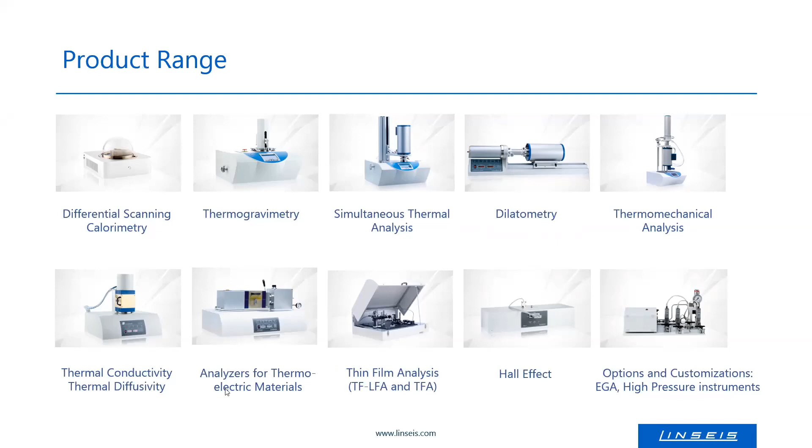But today's topic is thermal conductivity. So there are mainly 6 instruments I want to show to you. Those are the heat flow meters, the TIM tester, TIM standing for thermal interface material, we'll see later on what this is. LFA standing for laser and light flash analyzer. The transient hot bridge, hot wire technique, and 2 instruments for the characterization of thin layers, the thin film laser flash analyzer and the thin film analyzer.

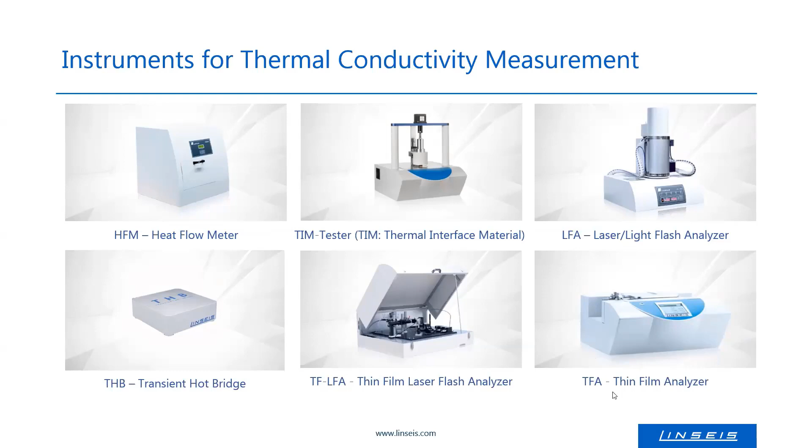Gases have low thermal conductivities as well. Liquids in general have thermal conductivities also far below 1 watt per meter Kelvin, mercury being an exception, but mercury should perhaps better be considered as a metal, and metals have the highest thermal conductivities of all materials. Copper has a thermal conductivity of approximately 400 watt per meter Kelvin.

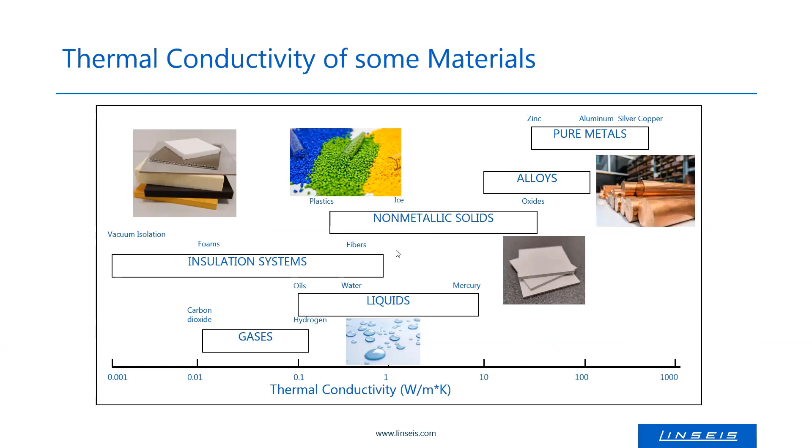In between are the non-metallic solids, plastics with quite low thermal conductivity, oxidic materials, ceramics, in general with thermal conductivities reaching some tens of watt per meter Kelvin. Alloys usually have slightly lower thermal conductivity than pure metals. So thermal conductivity covers a quite broad range from 0 to, let's say, 1000. And thermal conductivity is also dependent on the temperature. So depending on the application of your material, you should pay attention also to the measurement temperature.

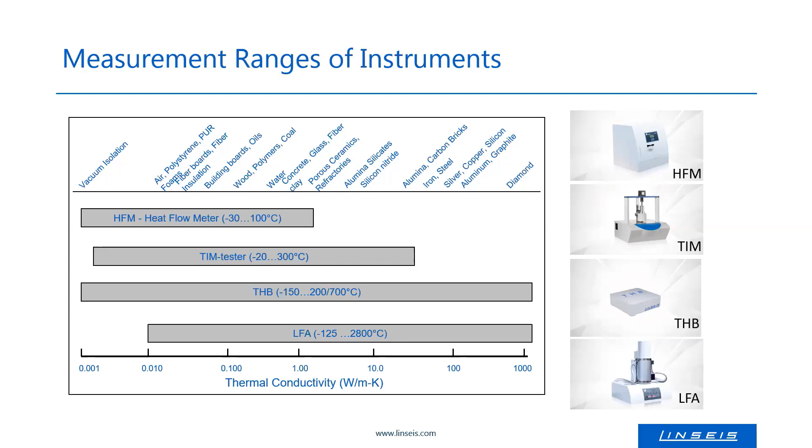So some instruments like the heat flow meter and the thermal interface material tester have a quite restricted temperature range, from low temperature to 100 or 300 degrees, while the hot wire method, transient hot bridge, covers a broader temperature range, and the broadest temperature range is that of the light and laser flash analyzers, from very low temperature up to very high temperature. Obviously, such a broad temperature range cannot be covered by only one furnace, but there are different furnaces for different temperature ranges.

So let's have a look at the measurement methods. They are divided in two groups, the so-called transient or time-dependent methods and the stationary methods. In a transient method, the sample is subjected to a thermal disturbance. So you have a short energy pulse, and then this disturbance is observed as a function of time. So you have a look at how this disturbance propagates through the sample. Important transient methods are the hot wire techniques and the laser flash technique.

Their advantage is that the measurement time is usually very short. They cover a very broad thermal conductivity range and a broad temperature range. The drawback is that the theory is quite complicated, but this is not the user's problem, but the instrument and software manufacturer's issue. And this is solved by us as a manufacturer.

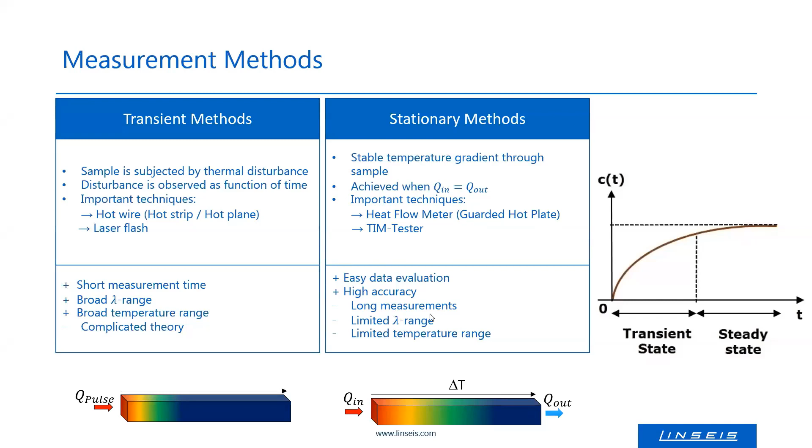So stationary methods work in the way that a stable, no longer time-dependent temperature gradient is established through the sample. And this is achieved when the incoming energy equals the outgoing energy of the sample, and there is a temperature gradient on it. The important techniques are the heat flow meters, the thermal interface material testers, and also guarded hot plates. The advantage is that the data evaluation is easy. The methods are very accurate, but they need quite long measurement times, and the thermal conductivity and the temperature range are restricted.

So let's have a first look at a first instrument, the so-called heat flow meters. They work according to a stationary method. So in such an instrument, you have a sample which is positioned between a heated plate and a cooled plate. Cooled plate and hot plate are kept at a constant temperature, while the heat flux through the material is measured by some transducers. And knowing the geometry of the sample, you can calculate by these formulas the thermal conductivity.

In real life, this looks like this. You have a hot plate on top. You have a sample and a cold plate below the sample. And between the sample and the hot side, there are some heat flux transducers. And between the sample and the cold side, there are heat flux transducers. As I already said, if the heat flux into the sample equals the heat flux out of the sample, you are in a steady state, in equilibrium, and you can measure the transferred heat and get thermal conductivity out of it.

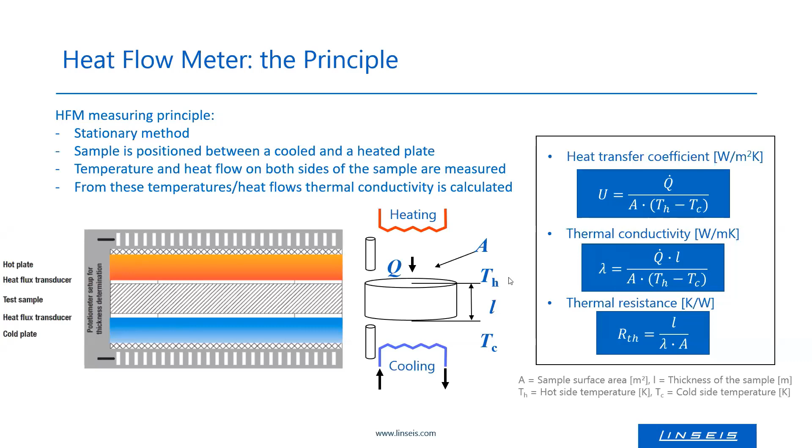A typical sample size is a board or a block of 30 by 30 centimeters and a thickness of a couple of centimeters. Usually compact solids are analyzed, but there are also adapters for powders and granules.

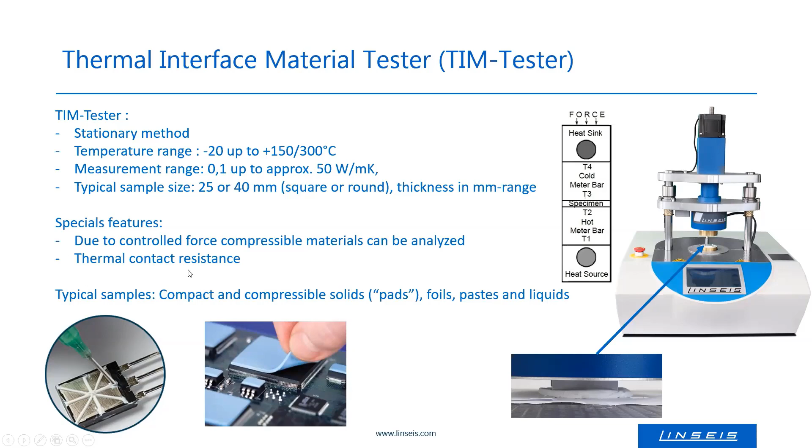So with this instrument, you can measure thermal conductivity not only from hard and compact solids, but also from compressible materials. And you get not only thermal conductivity, but you can also get the thermal contact resistance. How this is done is explained in an American ASTM standard.

So you have to prepare 3 samples out of the same material. They should have 3 different thicknesses. And then you run your measurement. And the raw data from a measurement is the so-called thermal impedance. And if you plot the thermal impedance of these three thicknesses against their thickness, you will find 3 points which are hopefully on a straight line.

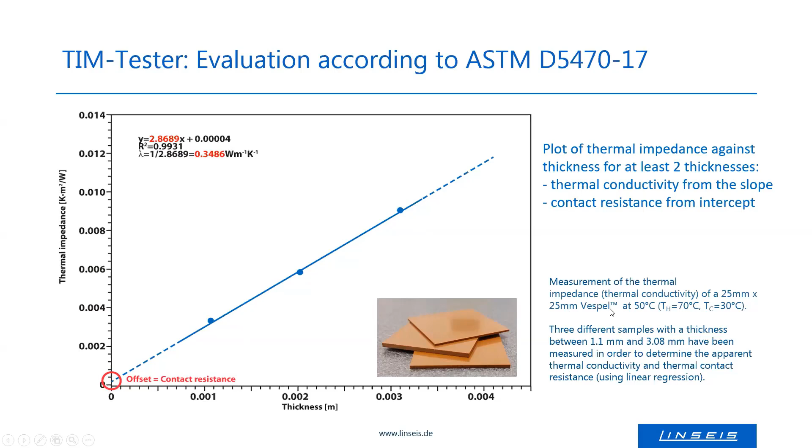And from the slope of this straight line, you can calculate thermal conductivity. And the intercept, the offset, is the so-called contact resistance. The example shows a Vespel material, a polymer. So those were the most common stationary methods.

Let's switch to a very common transient or time-dependent method, the so-called laser flash analyzer or light flash analyzer. This method is described again in a standard, and the standard says that a small thin disk specimen, a sample, is subjected to a high intensity, short duration radiant energy pulse, usually a laser pulse, but it can also be a light pulse from a xenon flash lamp.

This energy pulse is absorbed on the front surface of the specimen. So on this surface, the energy is absorbed, and then the energy will travel through the sample and will come to the rear face. And the resulting rear face temperature is recorded. So there is a detector, usually an infrared detector, observing the rear face of the sample and monitoring the temperature increase over time. And from this detector signal, you can get thermal conductivity. How this is done will be shown on the next slide.

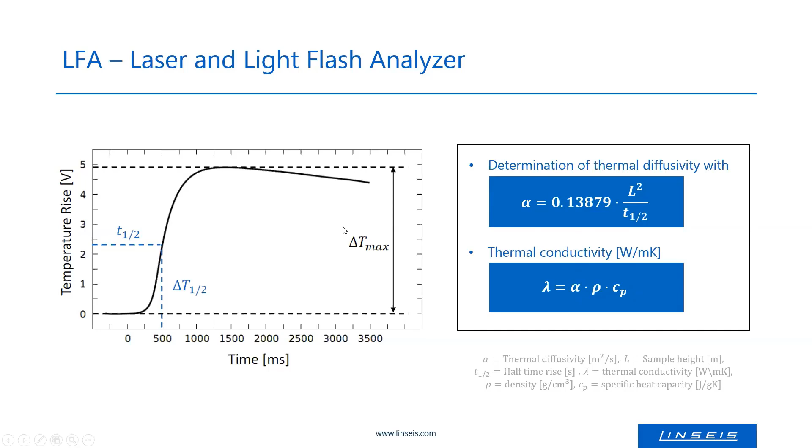As said, the principle is a transient time-dependent method. It covers a very broad temperature range and also a very broad thermal conductivity range, from poor thermal conductors to very high thermal conducting materials, so all types of material. A typical sample size is a disk of either 10 millimeter diameter or 25.4 millimeter diameter, which corresponds to an inch. It's an American standard. This is why this diameter is often used.

Such a disk should have a thickness in the range of approximately 1 to 3 millimeters, and it has to be well defined because you need the thickness, because you will square it to get thermal diffusivity. So every error you make on the thickness measurement and on the sample preparation will be squared.

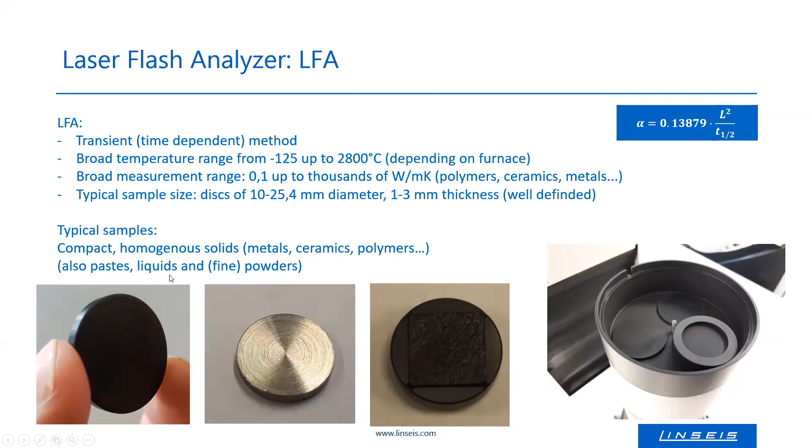Samples can be round. There are adapters also for square samples. Usually the samples are compact, homogeneous solids; they can be metals, ceramics, polymers, and other materials. And there are special adapters to analyze pastes, liquids, and also fine powders.

The second transient method I want to show is a hot wire technique. We realized this technique in our transient hot bridge, called THB. So as the name says, you have a wire which is heated. You have a thermometer close to this heated wire, and wire and thermometer are surrounded by the sample material to be tested. Once more, this is realized in such foil sensors.

In these foils are embedded hot wires which can be heated by an electrical current, and there are thermometers. And from these sensors, which are connected to the instrument and to a computer, you again get a temperature-time signal. In this case, the plot is done against the logarithm of time. And this yields this pink curve. The green curve corresponds to the slope of this pink curve.

And there is a maximum in the slope. And from this maximum, thermal conductivity can be calculated. This is done by the software. And you can also get thermal diffusivity out of this curve.

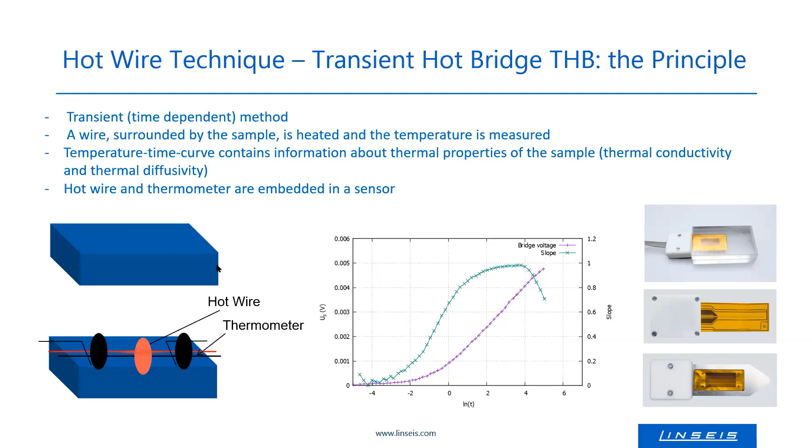So the temperature range depends on the sensor and furnace which you use. These polymer foil sensors cover a range from low temperature up to 200 or even 300 degrees. And there are ceramic sensors available going to higher temperatures. The measurement range is very broad, from isolating materials to high thermal conductors like metals.

And a typical sample size are 2 blocks, because you have to embed your sensor between these 2 blocks of the sample. And the blocks have to cover at least this inner part of the sensor, which has a size of 1 by 2 centimeters. The needed thickness of the sample is in a range of a couple of millimeters, and the required thickness depends on the thermal diffusivity of the tested material.

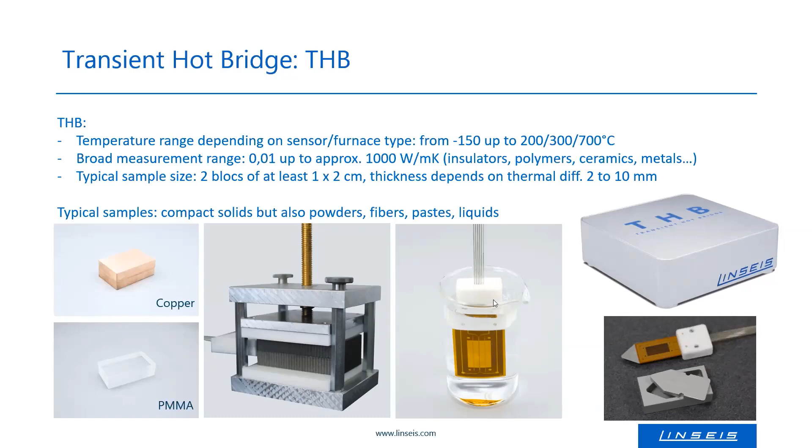So typical samples are these compact solids. This is plastic, this is metal, but you can analyze also powders, like shown here with this powder adapter. So you can fill powder in this hole, in this adapter, and insert this so-called penetration sensor in the powder. And you can analyze liquids just by dipping the sensor in a liquid.

So those were the analyzers mainly intended for bulk materials. Let's have a look on the instruments intended for thin films. Those are the so-called thin film analyzer TFA and thin film laser flash analyzer. They are intended to measure really very thin films in the nanometer to micrometer range and in a moderate temperature range.

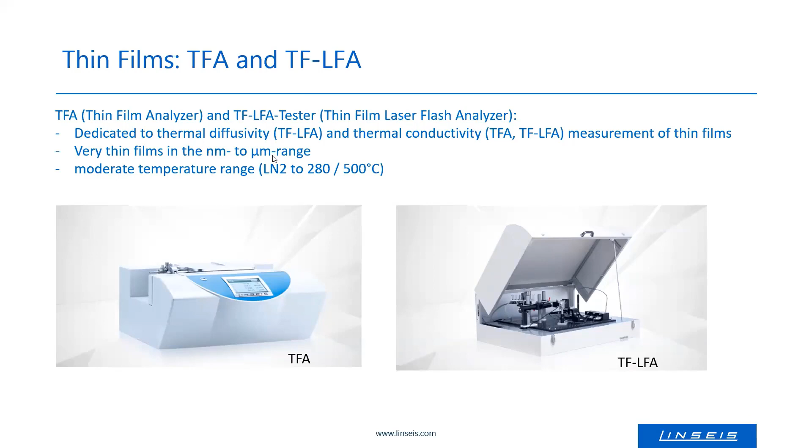So let's have a look on the thin film analyzer. It's a transient hot wire method. For those who know a little bit about the different theories, it's a 3 omega method. The thin film has to be deposited on a disposable sensor. The sensor is shown here in this picture. And the sample has to be deposited in this region. This is shown here on the picture.

And then the sensor with the sample is positioned in a sensor holder, which can be heated or cooled by liquid nitrogen by these pipes. And then you can perform a measurement in the TFA analyzer, and you get thermal conductivity and also specific heat capacity. And depending on the configuration of your instrument, you can also measure electrical parameters like the Seebeck coefficient, the electric conductivity, and the Hall constant.

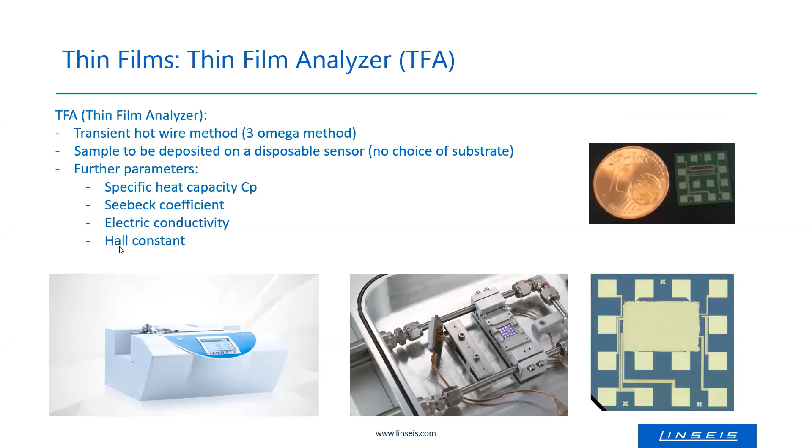And the second instrument dedicated for thin films is the thin film laser flash analyzer, TF-LFA. It's also a transient method, so-called time domain thermoreflectance method. In fact, it's a modified laser flash method. In a laser flash method, you use a short pulse laser to heat the sample's front surface. In a usual laser flash analyzer, this laser pulse has a length of a couple of microseconds to milliseconds. Due to the thin layer in a TF-LFA, you need a shorter energy pulse in a nanosecond range.

And instead of the infrared detector in a usual LFA instrument, which is a quite slow detector, you need a faster detection technique to monitor the surface temperature. And this is done in this analyzer by reflected light. So you have a continuous light, and the intensity of this reflected light is measured. And as the reflectiveness of the surface will depend on the surface temperature, once more you can calculate out of this time temperature curve the thermal diffusivity.

One important topic is that you do not do the measurement directly on the thin film, but you have to cover the thin film by a thin layer of gold, which is a reflective layer, and it serves as a kind of a thermometer because the reflectiveness as a function of temperature is known. So a typical sample is a sample covered with gold. So every sample you analyze is yellow. You put this sample in the sample holder in a furnace, which is here inside the TF-LFA, the thin film laser flash analyzer.

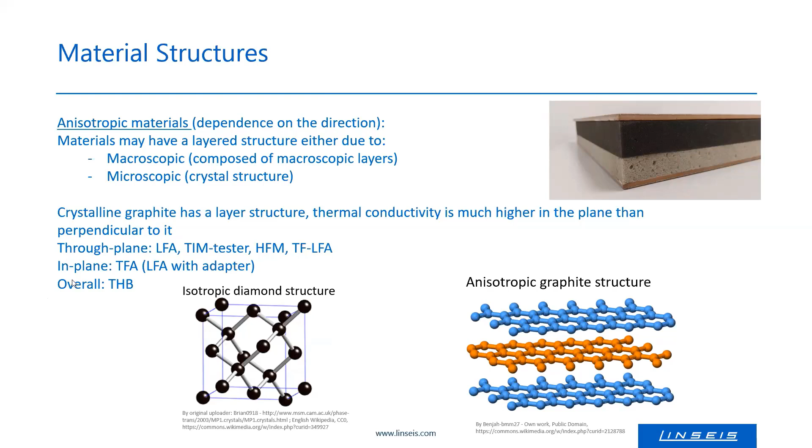Second point is the material may be inhomogeneous. For homogeneous material, there is no problem. You can analyze it with every method you like. But inhomogeneous materials have different compositions according to the space. So there may be grains of different composition and of different thermal conductivity.

So your method, if it has a small space resolution, you will measure perhaps only the thermal conductivity of one grain, while other methods measure the thermal conductivity of the whole sample. And usually you will be interested in measuring the whole sample, like in this example of a tile.

So if this is the case, you have to analyze not only one sample, but place your sensors or cut a specimen from different places of your sample. We will see this in an example at the end of this webinar.

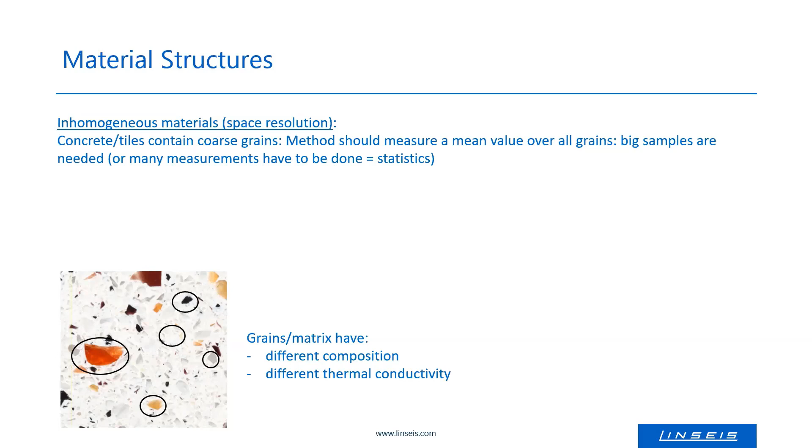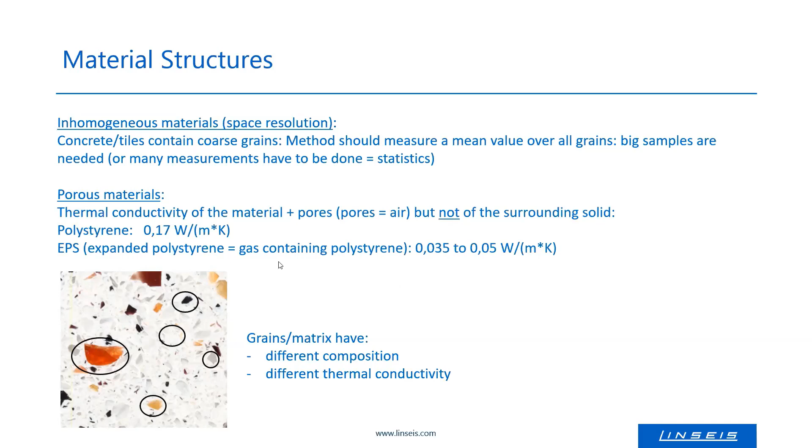A special example for inhomogeneous materials are porous materials. So in these cases, there will be no grains, but holes, which are usually gas-filled. And a very known example is expanded polystyrene. Polystyrene is a compact polymer having a thermal conductivity of 0.17 watt per meter Kelvin.

But the expanded polystyrene contains holes which are gas-filled, and due to these gas-filled pores, the thermal conductivity of expanded polystyrene is much lower than of polystyrene itself. So measuring the thermal conductivity of a porous material, you will not get the thermal conductivity of the surrounding solid, in this example the polystyrene, but you will get the overall thermal conductivity of the solid with the gas inclusions.

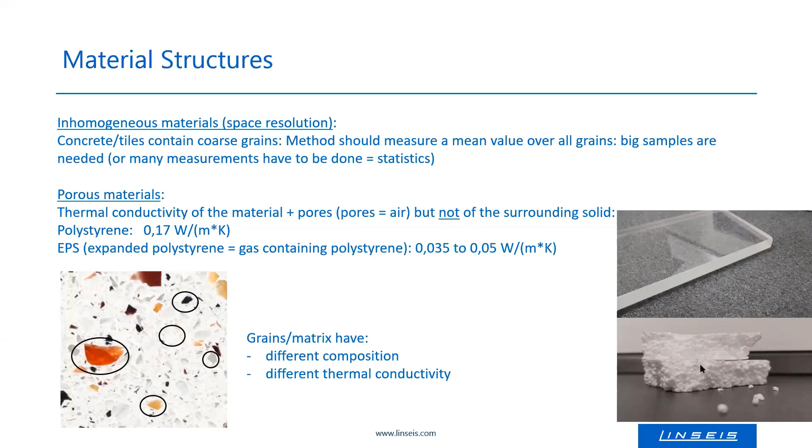So there are different material types, which I already showed briefly at the beginning. There are insulating materials like expanded polystyrene or fiber, straw, all these organic materials, often air-containing materials, which have very low thermal conductivity. And usually the temperature range you are interested in is quite close to room temperature, because most of these materials are used more or less at room temperature.

An exception are fiber insulations used in furnaces, for example. Their thermal conductivity has to be known at high temperatures, even exceeding 1000 degrees centigrade. Polymers have a slightly higher thermal conductivity, but it's still quite low. And the temperature range of interest is usually below 300, often even below 200 degrees centigrade, because at higher temperature the polymer will decompose or melt, and it has no application at high temperature.

The thermal conductivity of ceramics depends strongly on their structure and composition. Porcelain, for example, has a quite low thermal conductivity of approximately 1 watt per meter Kelvin, while nitrides have very high thermal conductivities of hundreds of watts per meter Kelvin. And ceramics are often used at high temperature, so your analysis should cover a quite broad temperature range as well.

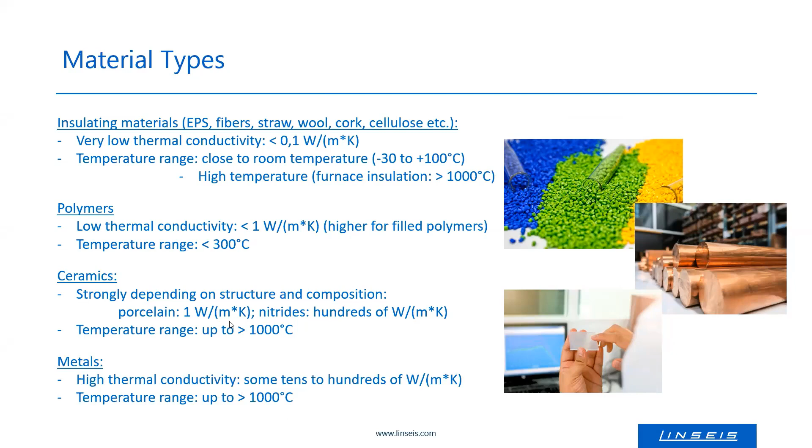So if you select an instrument for your specific application, you have to consider some criteria. The first criterion is the thermal conductivity range you are interested in. I divided them in 3 groups: a low range, a mid-range from 5 to 50 watt per meter Kelvin, and a high range. And depending on the range, you have to select your instrument. With the heat flow meter, you can't analyze highly conducting materials.

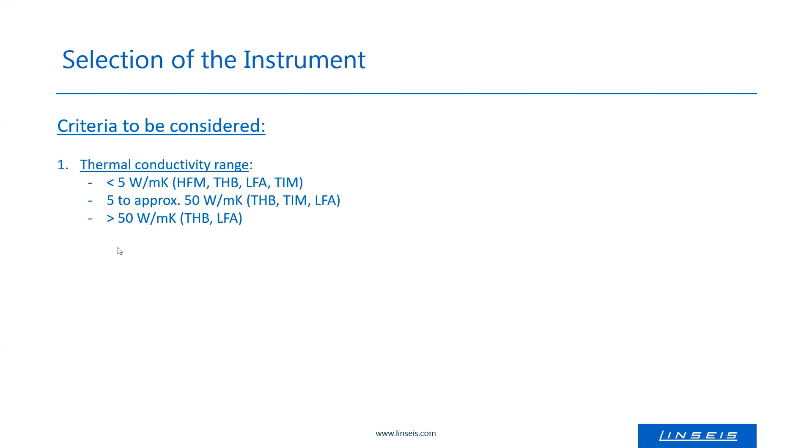The second point to consider is the temperature range you are interested in. Some instruments are able to measure at low temperature or close to room temperature. Others allow measuring the moderate temperature range, and others go even to very high temperature.

The third criterion is the sample size and its homogeneity. So there are instruments for thin layers. There are instruments which can analyze samples in a millimeter to centimeter range, and others need very big samples in the decimeter range, like the heat flow meter.

The fourth criterion would be isotropy or anisotropy of your sample and the direction of the measurement. Some instruments can analyze through the plane, others in the plane, or the same instrument, the laser flash analyzer, for example, can be used for through-plane and in-plane measurement, but it needs a certain adapter and sample preparation. And the transient hot bridge measures an overall thermal conductivity.

And last but not least, if you have to purchase an instrument, its price can be interesting as well. Laser flash analyzers are the most expensive analyzers, while the heat flow meters are the cheapest ones.

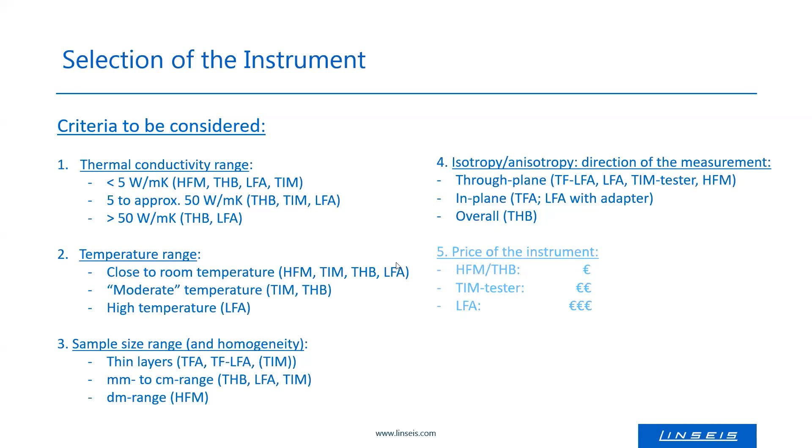So all this is summarized on the next slides. I divided them in three temperature ranges: a low, close to room temperature range, moderate, and high temperature range. I divided them in three thermal conductivity ranges: a low, a mid, and a high range, and the required sample dimensions: decimeter, centimeter, micrometer range, or even sub-micrometer range.

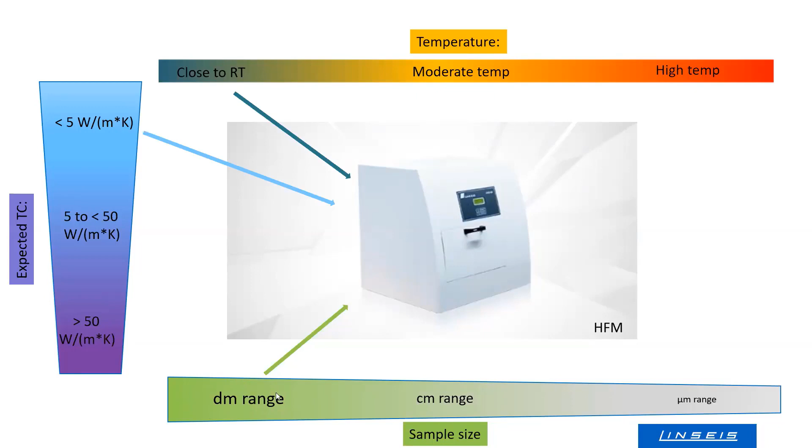The heat flow meter is dedicated to perform measurements on insulating materials close to room temperature and on very big samples of more than 10 centimeter sample dimension. The TIM tester has a broader temperature range, goes to moderate temperature, goes to the middle thermal conductivity range, and needs samples in the centimeter to sub-centimeter range.

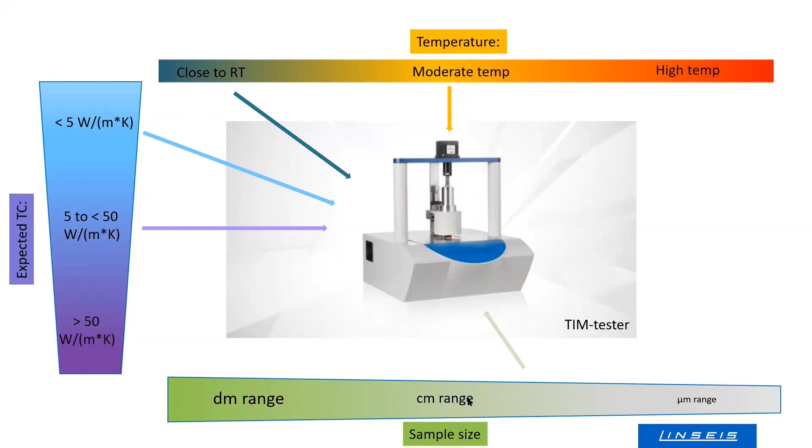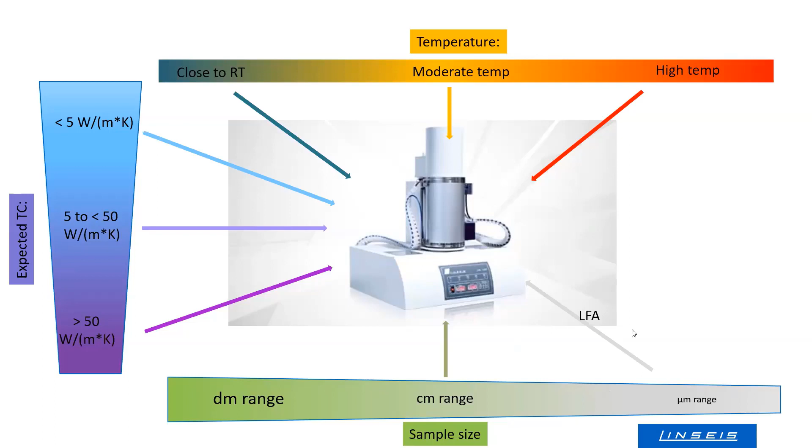The laser flash analyzer, being the most widely used instrument, covers the complete temperature range to very high temperatures as well, covers the complete thermal conductivity range from insulating materials to highly thermally conducting materials, and needs samples in the centimeter and sub-centimeter, even down to the micrometer range, for certain samples and certain adapters.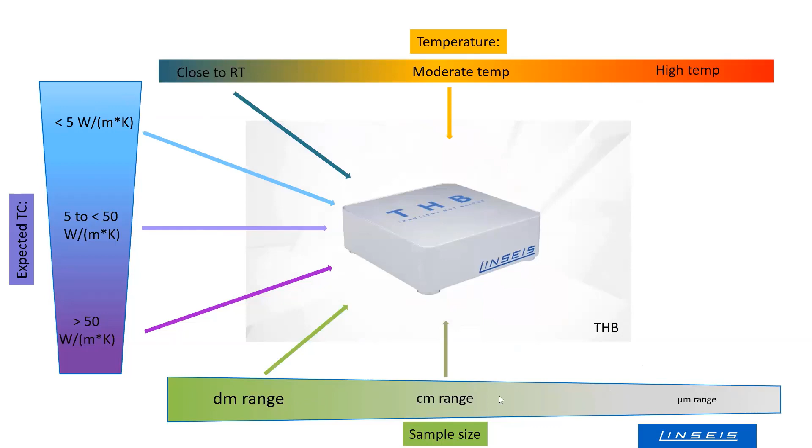The transient hot bridge covers the low and moderate temperature range, all thermal conductivities, and samples in the decimeter to centimeter range are needed. Last but not least, the thin film analyzer and thin film laser flash analyzers are dedicated to analyze samples in the sub-micrometer range to the micrometer range, in a moderate to low temperature range, and the full thermal conductivity range can be analyzed.

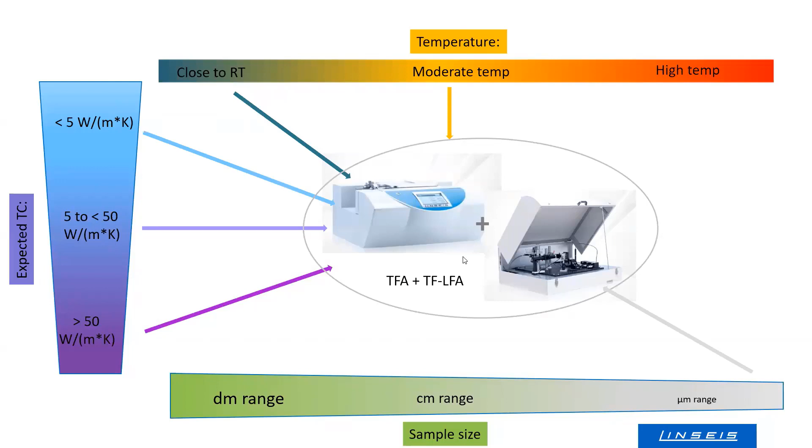Don't worry if this was a little bit fast. You will get a recording of this webinar, and you can have a closer look once more to memorize what is shown on all these pictures. You will find also on our website some tables showing which instrument is suited for which parameters, which price, with which temperature range, and so on.

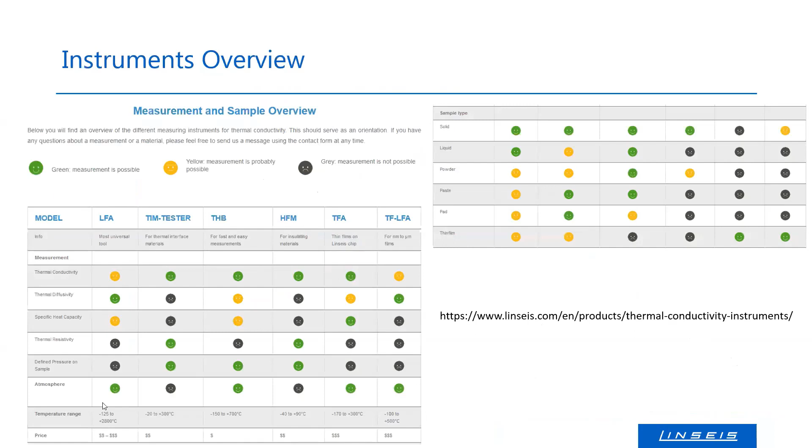So let's have a look at a couple of examples. The first example is a classical polymer application from room temperature to 100 or 150 degrees, which is often the melting point of the polymer. Sample can be prepared, let's say, in the size of approximately 10 by 10 centimeters and a thickness of 1 centimeter. So this would be such a block, for example. And thermal conductivity of a usual polymer is in a range of 0.1 to 0.3 watt per meter Kelvin. And the polymer is isotropic.

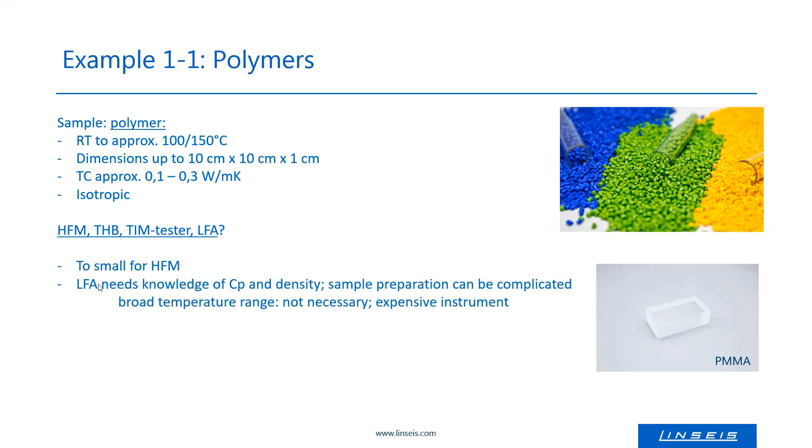So which instrument can be used? It will be too small for the heat flow meter needing samples of 30 by 30 centimeters. It would fit in a laser flash analyzer, but the laser flash method is perhaps a little bit complicated because you have to know the heat capacity and the density, and you have samples to be prepared with a well-defined thickness. One of the big advantages of a laser flash is the very broad temperature range which is covered, but this is not necessary for our polymer. And last but not least, it's a quite expensive instrument.

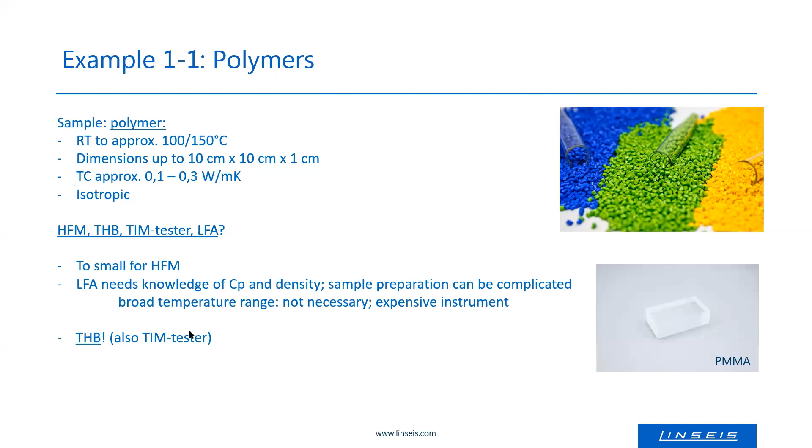So you can run the analysis on a laser flash analyzer, but certainly there is an easier method. And the easier method is the so-called THB, the transient hot bridge. It has an easy sample preparation, covers the temperature range, the thermal conductivity range. Sample is big enough. Material is isotropic. Everything's perfect for a transient hot bridge. You can also consider a TIM tester, but this would need a more complicated sample preparation. So for a simple polymer, things are very simple. The transient hot bridge would be the best choice.

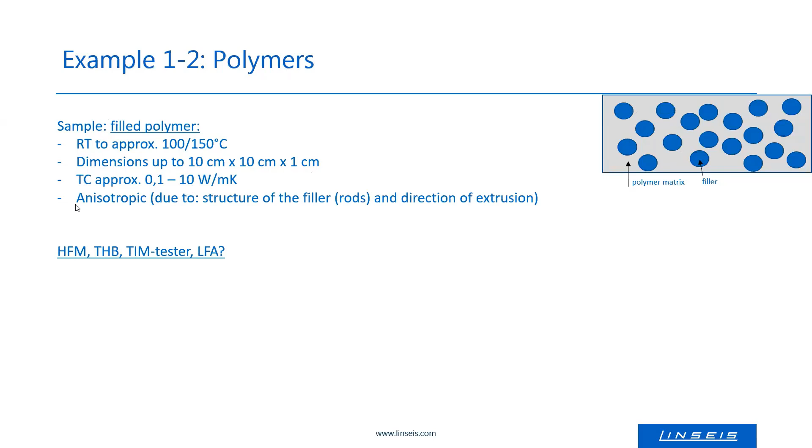Let's make things a little bit more complicated and go to a filled polymer. Filled polymer means you have a polymer matrix, and there are some grains included. This is often done to increase thermal conductivity of the polymer for a specific application. The application temperature would be the same, sample size the same, but the thermal conductivity will be much higher, perhaps up to 10 watt per meter Kelvin. And the material may be anisotropic. If your filler has a rod-shaped structure and you do an extrusion in a certain direction, the rods will be directed and thermal conductivity perpendicular to the sample plane will be different from the thermal conductivity in the plane.

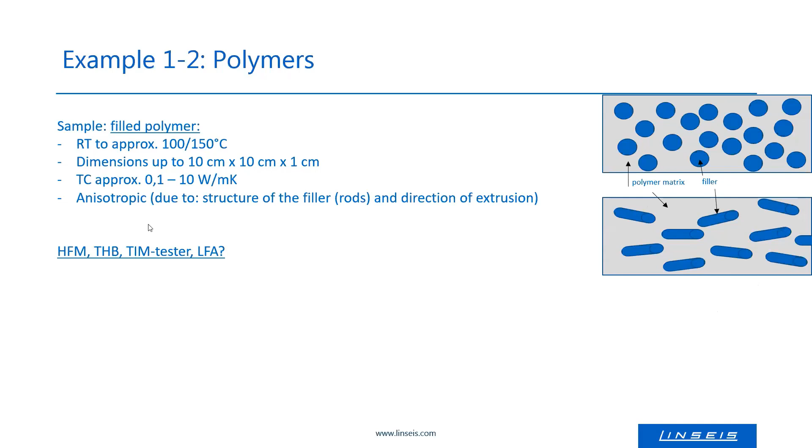So now things are a little bit more complicated. Which instrument to choose? In this case, it would be the laser flash analyzer or the TIM tester, because these two instruments measure the thermal conductivity cross-plane, so through plane or perpendicular to the sample's plane. With a laser flash analyzer with a special sample adapter and sample preparation, you can also measure the thermal conductivity in plane. Perhaps you can also consider the transient hot bridge if you are just interested in the overall thermal conductivity, which is not dependent on the direction.

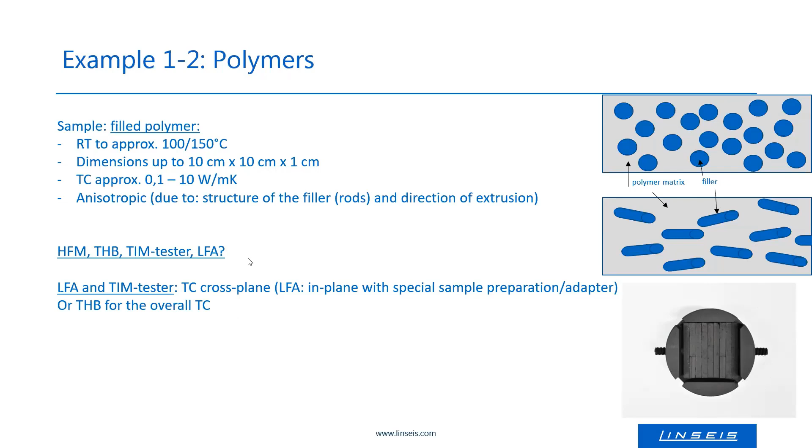And a last example for polymer, a soft polymer or a foam like shown in this picture that is compressible. Application temperature size will be the same as before. Thermal conductivity due to these air inclusions in the foam will be quite low. The material is certainly isotropic. So which analyzer shall be used?

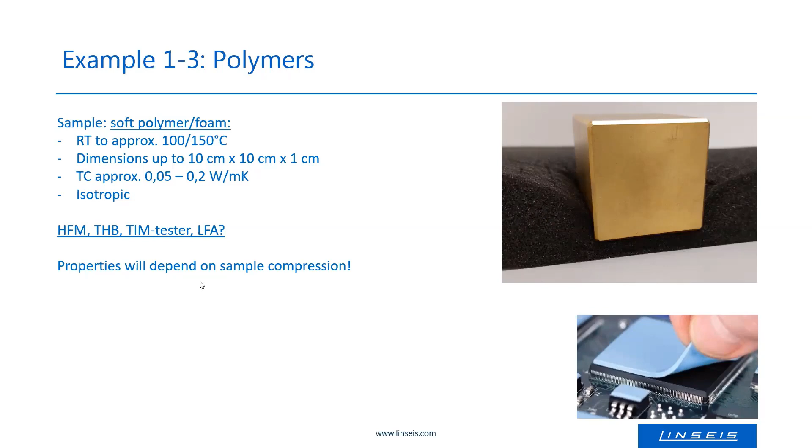In this case, the thermal conductivity will depend on the compression. So if you do a measurement of this compressed foam, there is less air in this material than in the non-compressed foam, and thermal conductivity of this compressed foam will be different from thermal conductivity of the non-compressed foam. So you have to consider that your properties of the sample will depend on the sample's compression.

And the TIM tester allows to control this compression, and you will get not only thermal conductivity, but also the contact resistance. So the TIM tester could be the perfect instrument for such a compressible polymer. You can also consider the transient hot bridge. You can use it with a special accessory to control the pressure of the sample. And if very big samples of 30 by 30 centimeters are available, you can also consider the heat flow meter.

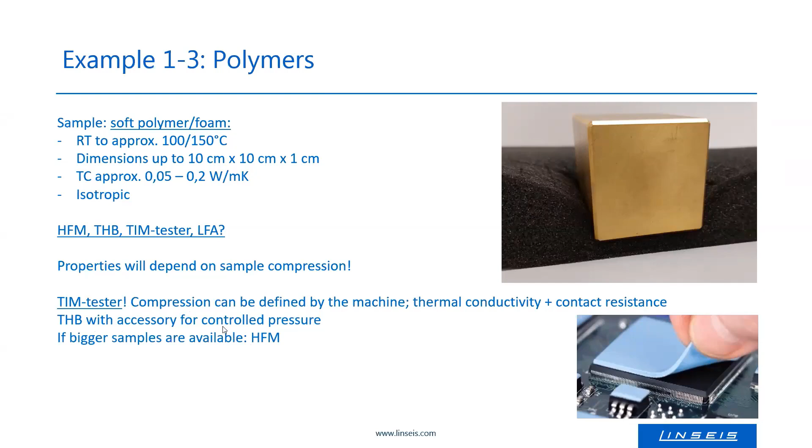So those were 3 examples of different kinds of polymers. Let's have a look at an example of a ceramic. Ceramics are often used at very high temperature. The dimensions, let's say they are the same as for the polymers we saw before. But the thermal conductivity range is very broad. It can be 1 for porcelain, and it can be hundreds of watt per meter Kelvin for technical ceramics, like nitrides, for example. Let's consider an isotropic ceramic.

The heat flow meter will not work on these materials for all of these reasons. It does not cover the temperature range, nor the sample size range, nor the thermal conductivity range. The TIM tester has a limited temperature range and limited thermal conductivity range. This will not cover all of the application. And probably the sample preparation will be complicated because you need 3 thicknesses. And sometimes it's difficult to prepare thin layers of a brittle ceramic.

THB will not cover the temperature range either, so the laser flash instrument is the only instrument covering the complete temperature range and can handle the dimensions, or you can prepare samples from these blocks which fit a laser flash analyzer.

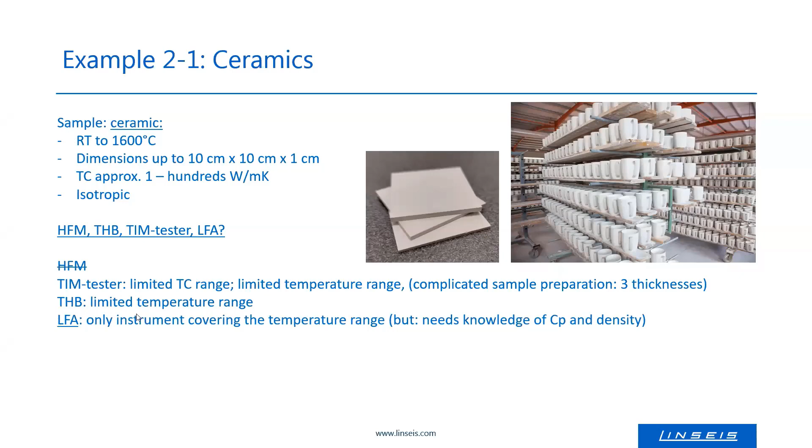A second example for ceramic is a ceramic containing grains. Always let's make things a little bit more complicated. So there are grains in your sample, size will be the same, thermal conductivity will be the same, but the material will be inhomogeneous. There may be grains in the millimeter range in it. There will be places where there are few grains, there are places where there are more grains.

But as the laser flash analyzer is the only instrument covering the whole temperature range, perhaps you have to handle this. And you have to prepare many samples, because depending on the place where you take your sample, this one or this one, the composition is different and the thermal conductivity is different as well. And you have to run many samples in order to get a mean value, to do some statistics on thermal conductivity measurement. So this can be a lot of work for sample preparation and data evaluation.

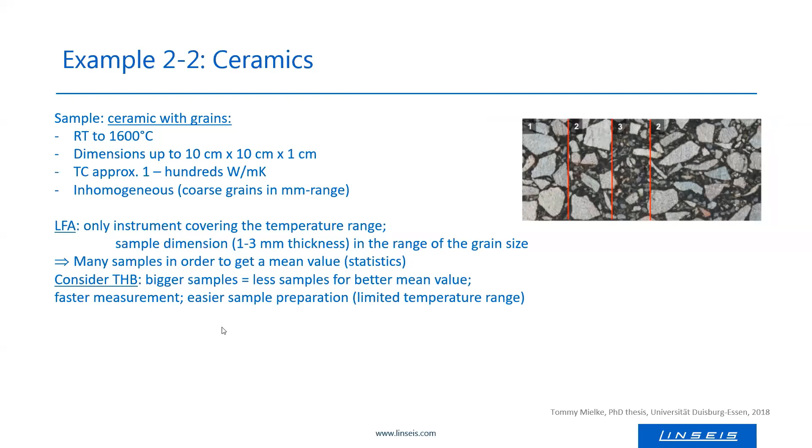Perhaps you should consider a transient hot bridge. Why? It does not cover the complete temperature range, but perhaps you can manage this. You can live with a smaller restricted temperature range, but the samples for THB are bigger, so you need fewer samples to get a better mean value. The measurement is very easy. Sample preparation is simpler than for a laser flash analyzer. And even if the temperature range is not covered, perhaps you can consider the THB for the other advantages.

If you had to prepare 120 samples for a laser flash analyzer, this would take probably days and weeks of work. For a transient hot bridge, this would take perhaps a day or so, or 2 days. So those were the examples I wanted to show. I hope that I created not more complexity than before, so that I helped you a little bit to guide you through the jungle of thermal conductivity measurement.